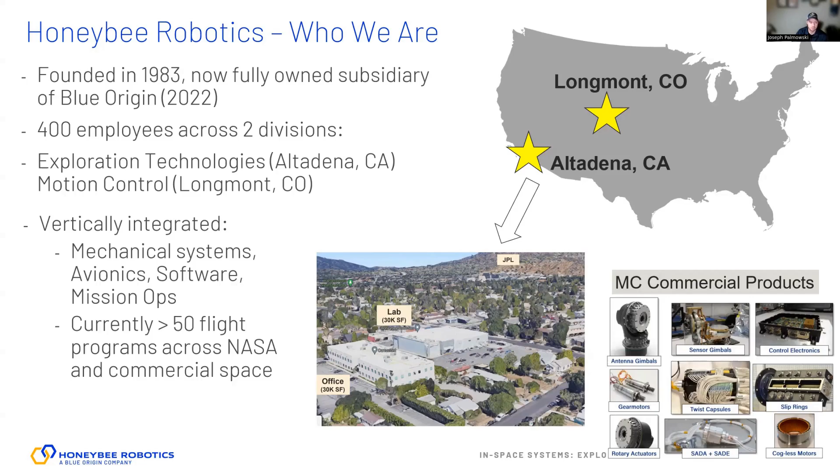Right now we have over 50 flight programs across NASA and commercial space. Our exploration technologies group focuses on 3 major competencies: robotic platforms, so robotic arms, power systems, mobility and deployment systems, and avionics and software, tying those things together.

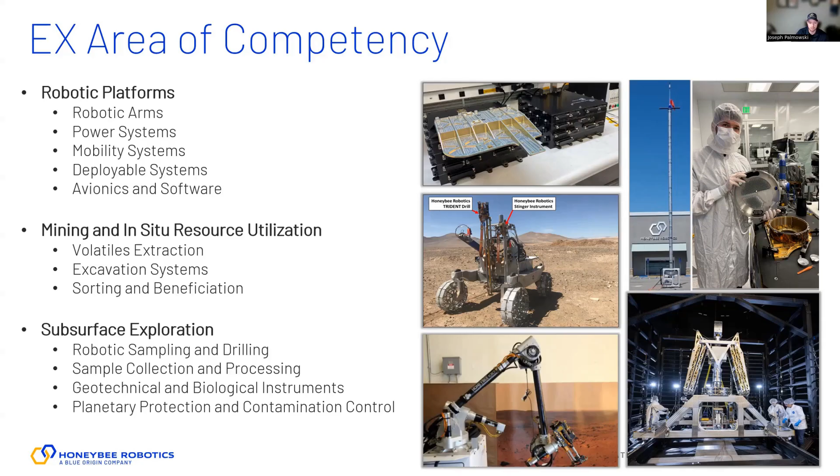We also focus on mining and ISRU, so volatile extraction, excavation, sorting, and beneficiation. Third is subsurface exploration: robotic sampling and drilling systems, collecting samples at the surface and processing those, then geotechnical and biological instruments, and planetary protection and contamination control. RedWater sits right at the intersection of the ISRU and subsurface exploration components.

So what is RedWater? At a high level, it's subsurface water mining technology to support ISRU on Mars. The idea is that we want to drill through the regolith overburden into these ice-rich subsurface glaciers to access what we think is fairly pure ice sheets, and then use heaters embedded in the drill for heating and circulation to the surface to create a melt cavity called a Rodwell. We can pump water to the surface to extract it, but we can also recirculate to continue the growth of that well until we're too deep or too large of a well to make it efficient enough to continue.

As far as the technology goes, in a nutshell, we're combining 2 terrestrial concepts that are pretty well established: coiled tube drilling with a Rodwell, which is the concept of a subsurface water well, a fairly established, well understood concept already used in the Arctic and Antarctic remote locations.

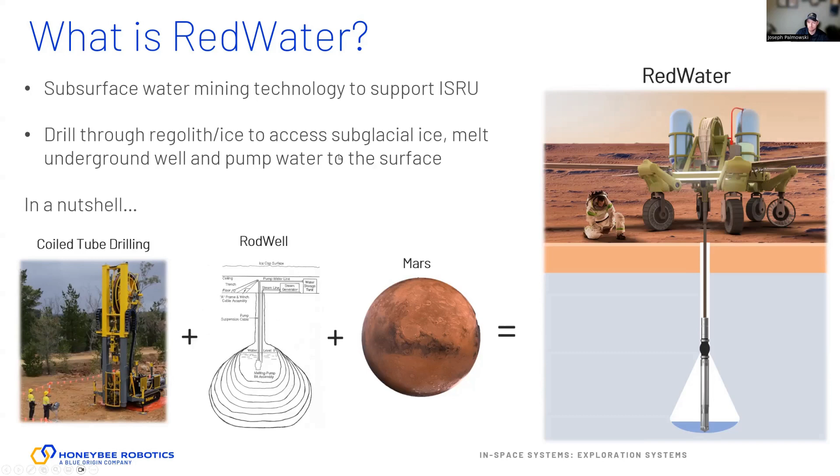So the water can be routed to either life support needs for a crewed mission, but most importantly, or at least the highest use case is going to be propellant production. So storing and transferring this water to a propellant production facility that uses both water and atmospheric CO2 using Sabatier to produce your O2 oxidizer and then your methane fuel.

As far as power generation, it's believed that'll most likely be a nuclear power source for the level of power that's needed, and there's been some development there that seems to be ramping up as well. As far as what the vehicle will be, Starship seems to be the baseline right now. Starship is also a very propellant-needy architecture, so we've baselined a volume of water needed for Starship, but some of the MAVs that have been proposed would actually potentially need much less water. So this is sort of a worst case scenario for getting off the surface of Mars.

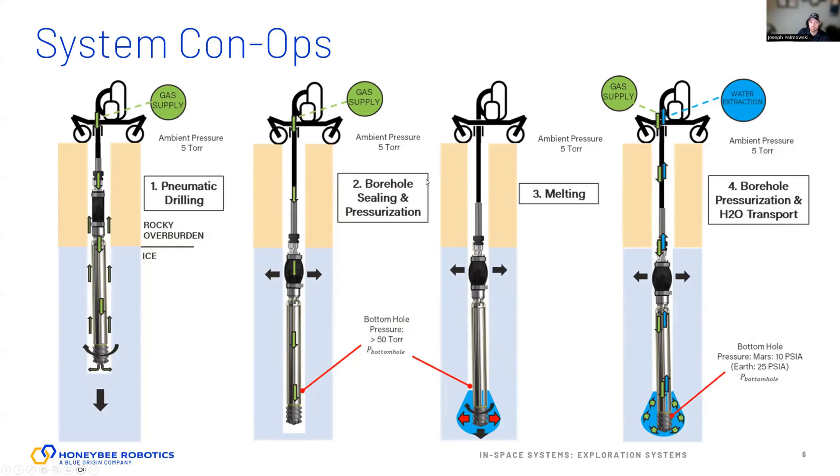Looking at the fundamental enabling technologies here, one of those is this concept of coiled tube drilling. This is not something that we invented, it's been around for a very long time in the energy industry. It's typically a much better alternative than using these jointed drill strings, which is a much more intensive process, with a larger surface footprint. So coiled tubing can significantly reduce the infrastructure required, and that's particularly beneficial in a remote location where you don't want to haul a lot of equipment in and out, like the fairly large trucks and mobile systems that have to move these out.

RedWater has the benefit of not needing to go nearly as deep as some of the terrestrial applications, which go potentially kilometers deep for their objectives. We're looking, like previously said, at 10 meters, potentially up to 20 meters depth. And then some of the other requirements allow us to have a much smaller footprint, which is a more compact system, necessary given the current limitations of actually getting hardware to Mars.

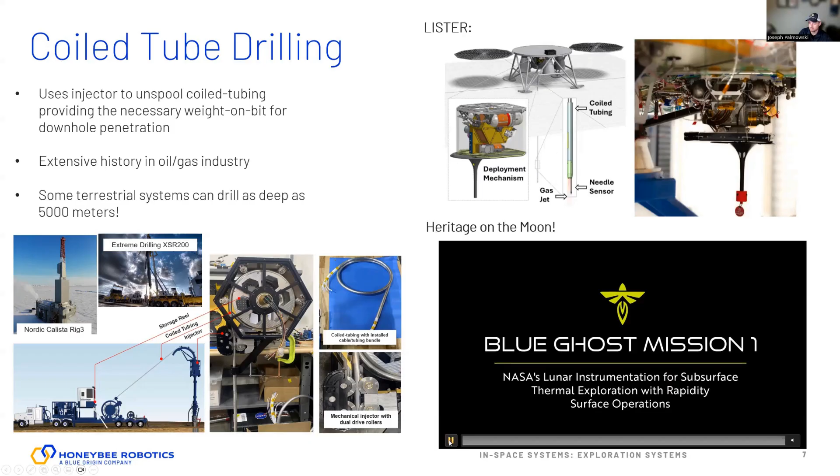And this actually isn't even a novel concept for space exploration. Honeybee developed a system called Lister, which recently was demonstrated on the moon as part of Blue Ghost Mission 1, an even smaller system for doing subsurface thermal analysis on the moon. This happened, I think the operations happened in March or April. I actually have a video to show you what that looks like from the perspective we were able to get from one of the cameras on board.

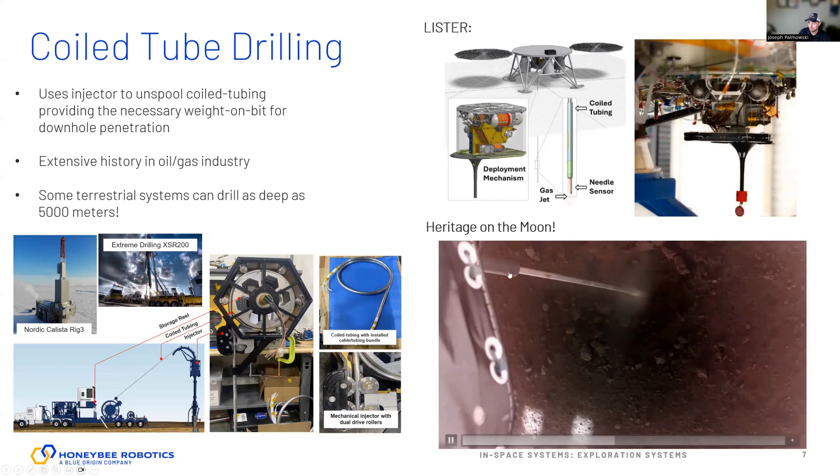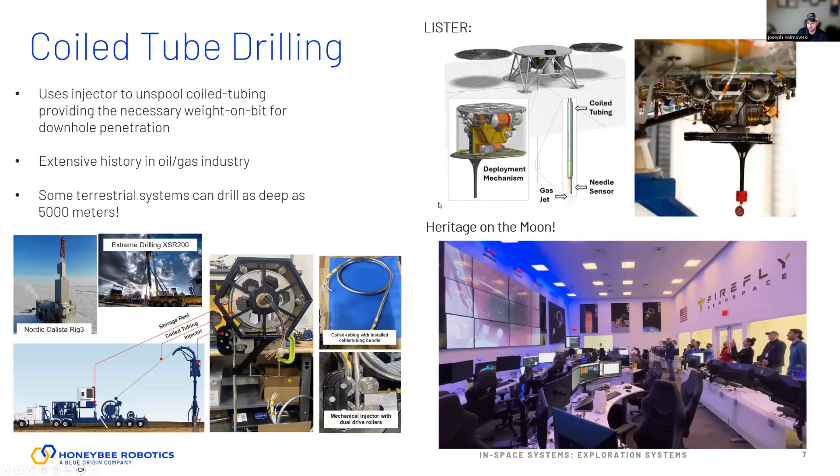So you can see the coiled tubing is already deployed to the surface. It's using its pneumatic gas to penetrate downward as it deploys the coiled tubing. This Lister does not have a rotary percussive drill, so it's limited to a fairly shallow depth, since as you get deeper you get more consolidated regolith, potentially rocks as well. So what we've done on RedWater to de-risk that is we've added rotary percussion at the tip so that if we were to hit an obstacle like that, we could drill through it.

This is a Rodriguez well, which I previously discussed, so this is not a new concept. It was developed by the U.S. Army in the 60s for remote military camps in the Arctic and Antarctic, and it's been highly successful at generating large quantities of water in remote locations for quite some time now. We've leveraged this concept, and I want to give credit to Dr. Stephen Hoffman, who was the first to present this concept as something for Mars. A lot of his work was inspiration for what eventually became RedWater.

We initially built this TRL5 brass board version of the system. This allowed us to integrate all the subsystems and validate it as a single system. We kept some things modular that were still not fully sorted out as far as the exact design.

The injector system is something we had to innovate on, because typically in oil and gas they use much larger, higher sources of energy to straighten these tubes out, and they even have much larger reels. We actually have a higher energy requirement because we coil up our tube so tightly.

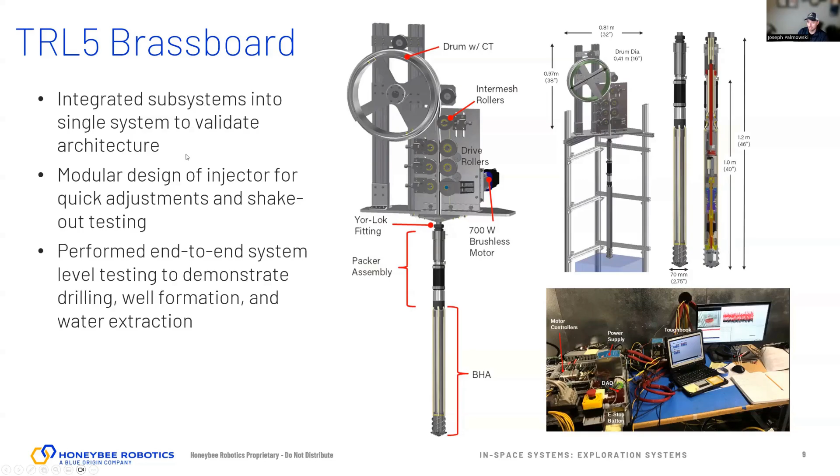It's necessary for the volume requirements of current Mars missions, and we weren't exactly sure how this injector design would shake out. So we kept it somewhat modular, with additional sets of rollers and the ability to adjust the exact positions. One of the challenges is getting the straightened tube coming out here, because you obviously want it to go down hole straight. We used this TRL5 system to sort that out and performed end-to-end testing.

That included testing in TVAC. We successfully ran a TVAC test in a Mars-like environment, pumping the chamber down to somewhere around 5 to 8 torr while we tested, using active LN2 circulation to actively cool the ice down to minus 70 C. You can see some of the results from that testing.

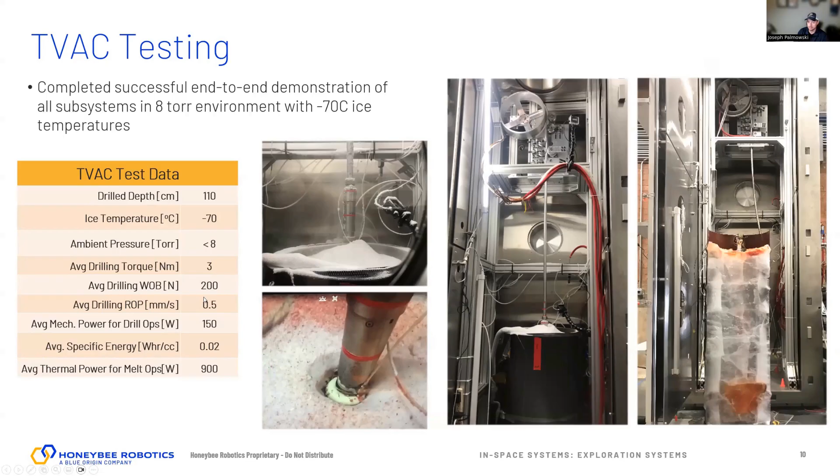After that round of testing, we were awarded an additional option on funding to advance this to a flight forward design of RedWater.

You can see the repackaging, which somewhat resembles the Lister payload that went to the moon, giving us a better overall profile on mass and volume. We were able to constrain our injector to an exact geometry and keep everything more rigid. We used some flight forward components, not entirely — I wouldn't call this exactly TRL6.

There's probably a little additional development that would need to go on in the next stage. Even after these flight forward advancements, it's still a fairly heavy system. There's still work to be done if we want to not be pushing 100 kilograms. This particular mass does not include the avionics and gas — this is just looking at the hardware, the drill itself.

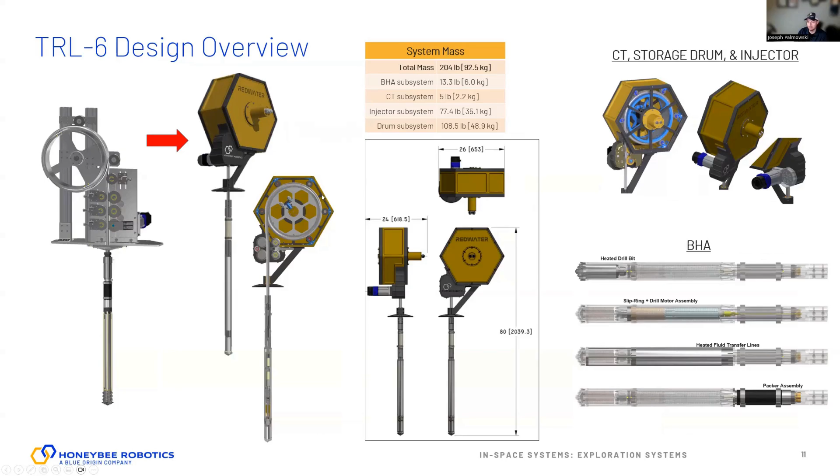Still a fairly heavy system. The previous system was scaled back to only be a large enough coil for our TVAC chamber, about 1.5 meters of depth. We actually scaled this one up in the event of future field testing, so this system is capable of around 10 meters of depth, which is also factored into the mass. We did this based on the limitations of this round of testing.

We stuck with a freezer test for this version of the system, doing a full end-to-end test in our walk-in freezer, which we can maintain around -10 to -15 C — not quite Mars temperatures, but enough to keep an ice block frozen. We built a custom ice tower to drill into, purchasing ice sculpture blocks and fusing them together to make about a 2 meter tall tower.

We use these because they're extremely clear ice, and as we're drilling we can get good imaging and video of what's actually going on, and somewhat of a feedback for how the Rodwell is forming versus what our model said.

So just a few of the ConOps that we tested here. Initially, you of course need to drill to your target depth. So that's what's happening here, pneumatically clearing - you can see the cuttings pneumatically being shot out of the borehole. We did a hybrid melt drill descent to see power requirements for that operation, and then an actual Rodwell formation to start generating enough water that we could extract.

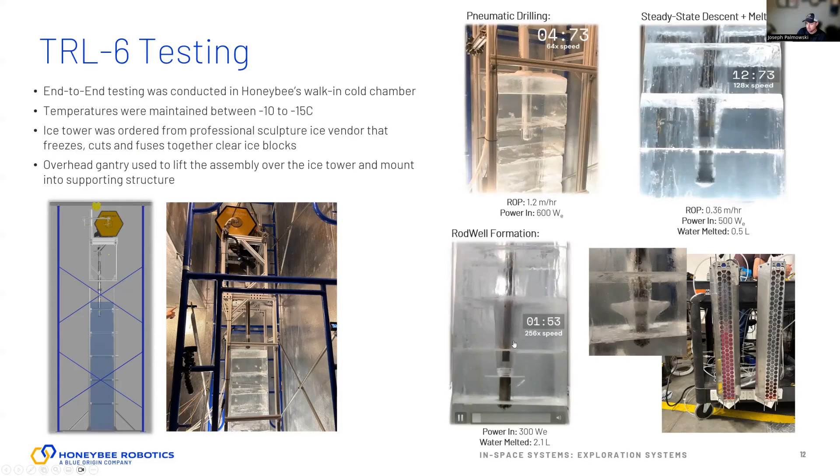And then we did our extraction operation and successfully collected a fairly small amount, just based on the limitations of how much you can melt in this size of an ice block.

The science application of something like this - there's the ISRU angle where we need resources, water on Mars for propellant manufacturing and life support systems, but there's also objectives to go to Mars and look for life. How do we do that? There's been past missions to do that, but I think the next step is to penetrate subsurface deeper to look where you have the untouched subsurface that hasn't been touched by radiation and sublimation. So to explore deeper, you're going to need something that goes beyond the top layer there.

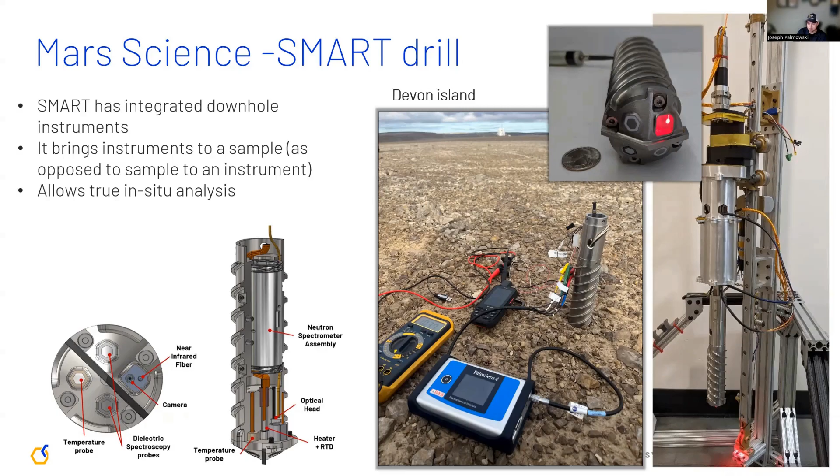So we've been working on a technology where at the tip of our drill we could embed instruments like a gamma ray neutron spectrometer, a near infrared fiber for spectroscopy. We could do temperature sensing and heaters for a conductivity measurement. We even embedded a camera in the tip for context imaging, and all that could go at the tip of something very similar to RedWater, where you have a 10 to 20 meter depth range and a similar package.

And then you put something like the smart drill that I just showed at the tip of that. This system is very similar to RedWater, except you have your instrumentation suite above that. Not quite - this one is more designed for a 1 meter class drill where you can put everything right at the tip. In this case, since we have our drilling components in the tip of the drill, we would put science instruments behind that.

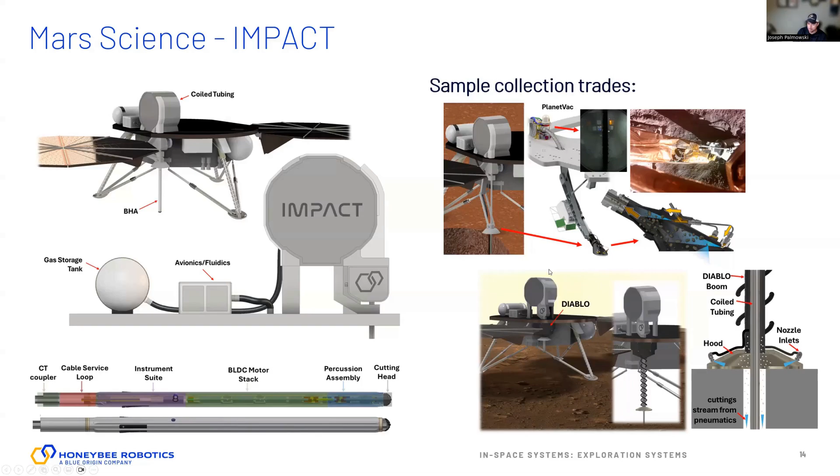And then you could also enhance this with cuttings collection at the surface using something like Honeybee's PlanetVac concept of a pneumatic sampling head. And then you could either deploy that with a robotic arm, or we have another linear deployment stage where you could deploy around your coiled tubing to create a conduit to transfer your cuttings from the surface up to the lander, where you could have additional science operations with a sample carousel, similar to what we've seen on past missions. But in this case, cuttings are coming from much deeper than just the surface.

And that's it. Yeah, thank you very much.

Thank you. We're running a little late, had the quick Q&A running for very long. Interested in about the size of these things, can you tell me? I think I saw like 600 watts for one of your systems, which seems pretty small. Are you going to scale up to kilowatts and tens of kilowatts?

Yeah, so the image here is sort of the conceptual one, but what you saw previously, as far as drilling and heating operations, which is what we were focused on at this stage, I would say you expect somewhere between a half to 1 kilowatt in electrical power coming in. But of course that continues to scale depending on secondary operations. For starters, you assume you're bringing gas with you, but you could potentially have a system that's extracting CO2 and compressing it from the atmosphere - that would obviously require additional energy. And then any of the processes that happen after the water collection itself are going to add to the energy budget. Those aren't necessarily accounted for in that power figure - that's strictly just the drill and the heating itself for the Rodwell.

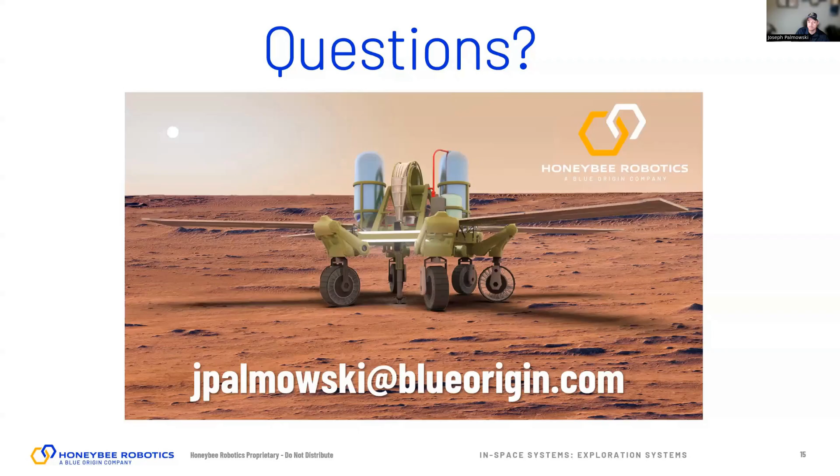Well, thank you very much for that. It's quite an honor to be listening to Joey here - the honeybees right at the center of things, actually doing things on Mars. Anyway, we got to wrap it up here.